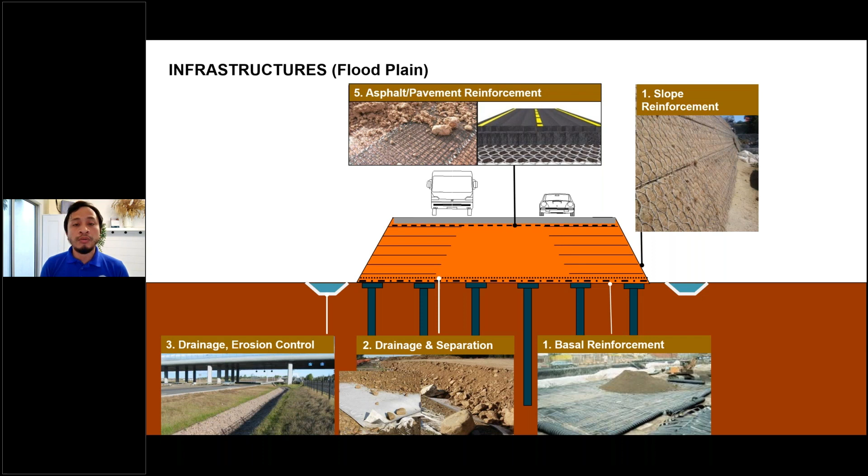That's one. And then also talking about space restriction nowadays - base side is almost gone, you will live with a very narrow ROW, so you have to build a steeper embankment. So what you can actually do here is introduce the reinforcement element into the fill so that you are able to build a steeper embankment, talking about 60 to 70 degree slope angle. And pavement - yeah, this is also something new - you can actually improve the design life of the pavements. Later we'll talk about this also.

And another scenario - infrastructure projects, road works - you will have to cut through the hillside, so talking about the balance of cut and fill.

On the left, you have to consider the hydraulic works and channel bank improvements. Maybe you have a river crossing, looking at the box culvert. What are the anti-scouring measures that you want to look at?

You'll also have rock slopes on the cut sections, and what are the things you can do instead of strengthening the slope. Maybe because of limited budget, you can install rockfall protection, which is more cost effective than strengthening the whole slope.

Similar to hydraulics and rockfall protections, an element of risk management is involved. You start looking at what are the risks to the public, whether low risk or high risk. These are the considerations for selecting the sustainable solution.

Lastly, this one you can see here is basically cutting through mountains, and this is another transportation project, railway. So what can you actually do to minimize the risk of rock falling and affecting the asset you want to protect here?

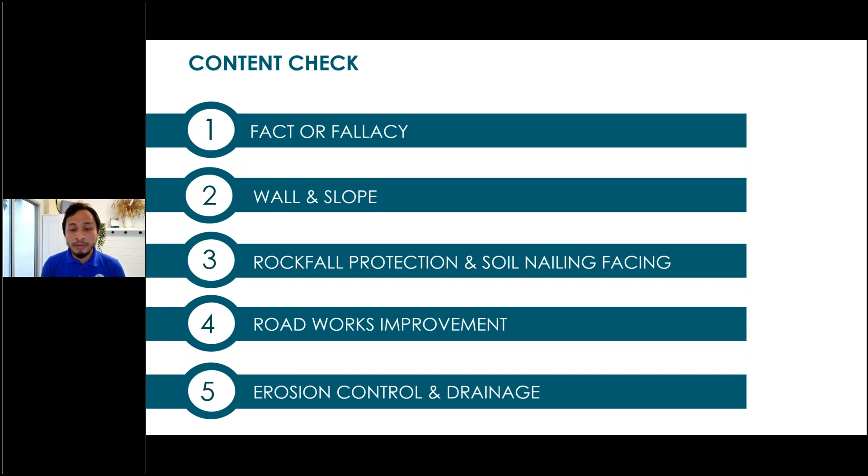Then we'll cover in detail walls and slopes, rockfall protections, and I'll give you an introduction to roadwork improvements, like basal reinforcements and pavement reinforcement, and lastly erosion control and drainage which is more related to hydraulic works. We'll go on to the concepts and engineering principles, and look at some mitigation measures you can implement for sustainable solutions.

Now this is our first misconception. Point number one is that sustainable solution is about green, low carbon emission only. This fact is not quite right. What does this mean? It's not just about lowering carbon emission.

We also want to recover back the carbon that has been released. So the sustainable solution allows for environmental integration. You can see here this is actually a reinforced soil slope using double twisted mesh facing, and you can't even see the steel mesh anymore after a few years. In fact, in Malaysia you start to see this even after several months, because we are a tropical country and grass can grow faster.

The whole idea is once this vegetation has been established, you recover back the carbon. So you're talking about carbon sequestration.

This is one of the projects in Italy, actually in River Reno. You can see here the gabion installed in 1894, and it's still there today. You can see that the structure is still standing - it's durable enough to meet the design life, and more than the design life that was designed for 100 years.

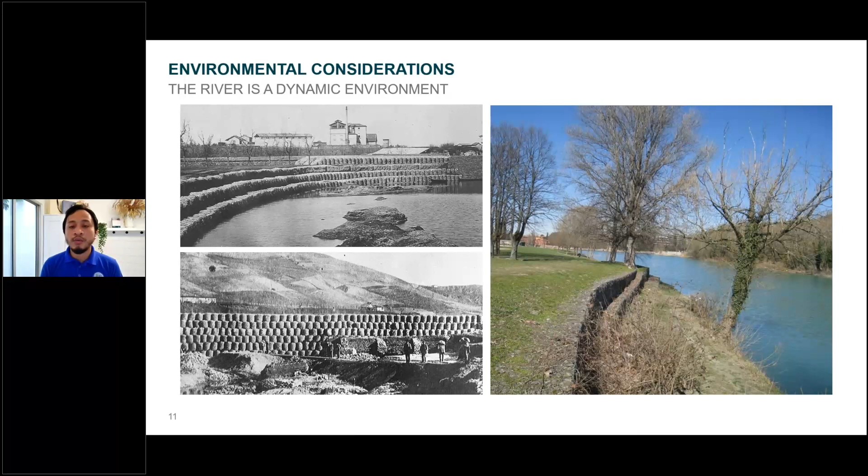When we talk about sustainable solution, it's not just about environmental friendliness. If you design this correctly, you can use this solution for many types of situations - building a fill over weaker ground, or utilizing excess cut material from a cutting section. Rather than using granular backfill, you can use this material with low hauling distance, meaning low carbon emissions, and introduce reinforcement elements into the materials, allowing you to build a steeper slope.

Going back to the earlier point on scarcity of materials - on one highway project we're working on, still ongoing, they have about 3 million excess cut, and what they do is utilize at least 60% of the cut as fill material for the fill section construction.

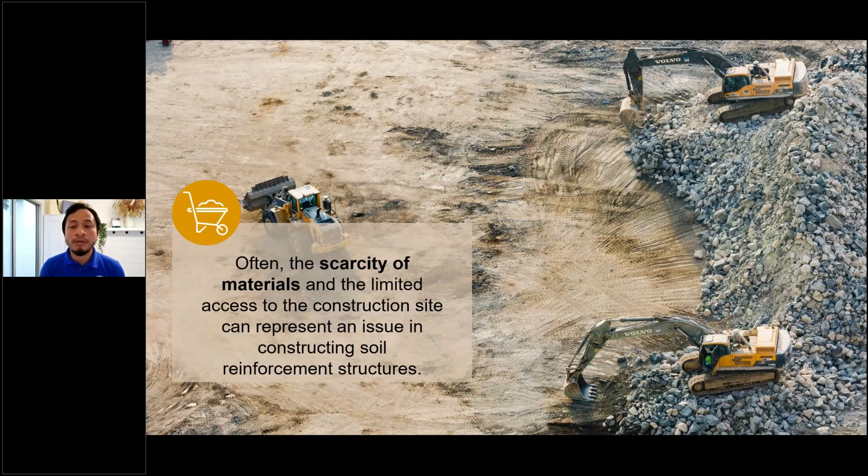So this is about the introduction of high strength reinforcements, and introducing vegetated facing on the front face of the reinforced soil.

Now, a sustainable solution, because this is also an engineered product, it's all been assembled in the factory. Talking about productivity, one advantage is that some products are modular, meaning everything is assembled at the factory. You just proceed with field placement, for instance for reinforced soil construction, as you can see in this picture. All the material is assembled at the factory, so it's quick to install and doesn't require skilled workers.

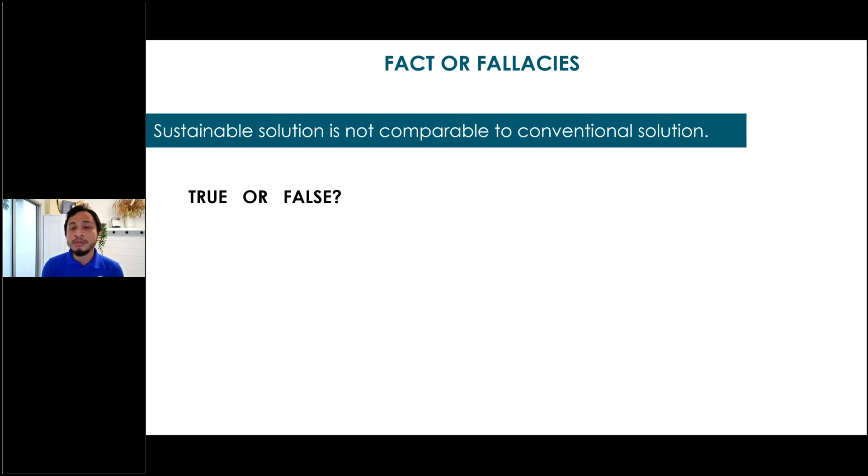Fact number 2 we want to cover today is that sustainable solutions are not comparable to conventional solutions. This is pretty subjective, I think, because as engineers we always rely on precedence. We want to design with materials we're comfortable with based on past experience. That's why this talk is a good opportunity to introduce a new solution. At the same time, this is not a magical product. It doesn't work wonders if you don't obey the engineering principles behind it.

And this one is an 80-meter high rock facing wall.

This one, let's just talk about durability. If you look at this gabion, some argue in Malaysia that gabion is meant for temporary works. Later I'll show you that if you design the right coating, a gabion can be designed for up to a 120-year design life. This is all covered in British Standard EN 10223 together with ASTM A975.

Now, when talking about durability of sustainable solution gabions, one issue you normally encounter is corrosion on the gabion. This happens because the coating is actually the line of defense for the gabions. Once the coating is exposed, the base metal is exposed to atmospheric conditions and corrosion starts. When you have corrosion, you get tearing of the gabions, and eventually the rock fill in the cage washes out into the river.

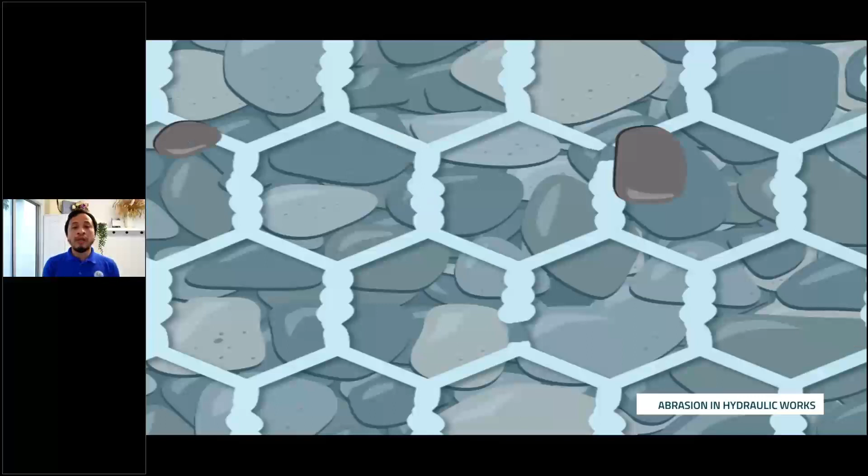Now, abrasion means, as you can see from the video, in our rivers you normally have high suspended sediments, and these suspended sediments apply abrasion forces to the coatings. Over time, throughout the exposure during the service life, you start to get a reduction of the coating layer.

So one of the advancements over the years is what we call advanced coating, which has higher abrasion resistance. Later I'll show you how you can verify this abrasion performance through laboratory testing.

This is a new clause that has been added in ASTM A975 2021, and you can see from this clause that abrasion resistance testing has been added to the test index. This abrasion test compares the performance of advanced polymer coating as opposed to the typical polymer coating normally used in Malaysia, which is PVC. You can see here this coating will have better resistance to abrasion.

What the test does is try to scratch the coating and measure how many cycles it takes before the base layer of the base wire starts to be exposed. For comparison's sake, advanced coating gets about 450 cycles, as opposed to PVC which is only about 50 cycles.

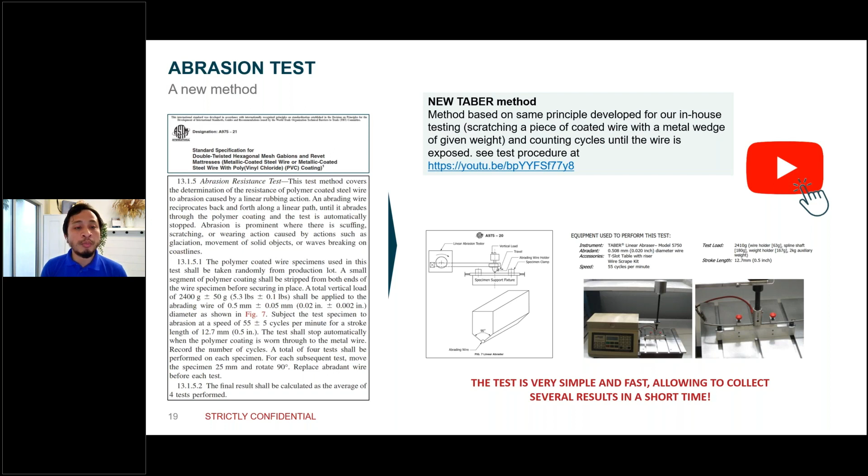So these are some of the additional product innovations that have been introduced in the market. If you think it's suitable for a project, especially on river works, you can explore it as a solution.

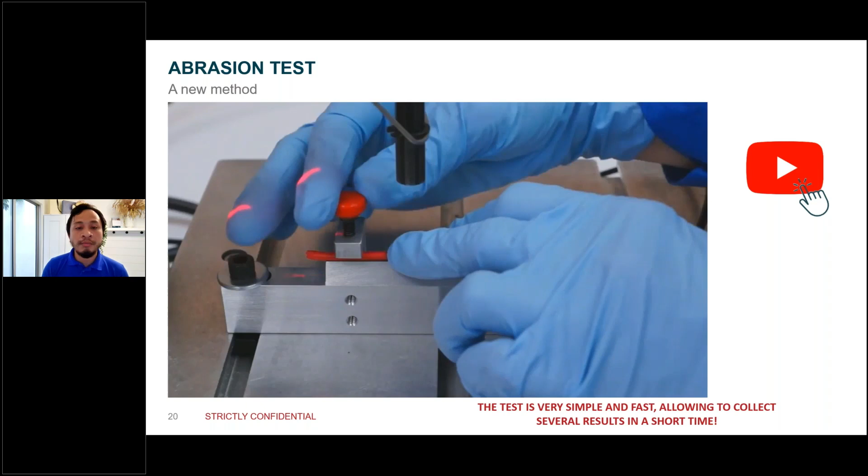Now, this is just to show how the test is carried out, and you can see here the machine and equipment. What this does is try to scratch the coating layer that protects the base wire. You can see here the lab technician trying to assemble it. It's a very simple and fast test, and you can do it in less than 10 minutes.

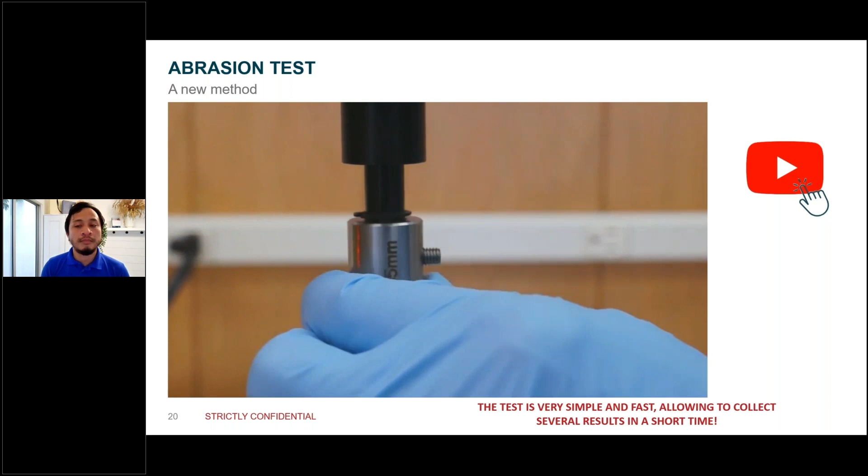So I'll maybe bring it forward. I just want to show you how they actually measure the cycles.

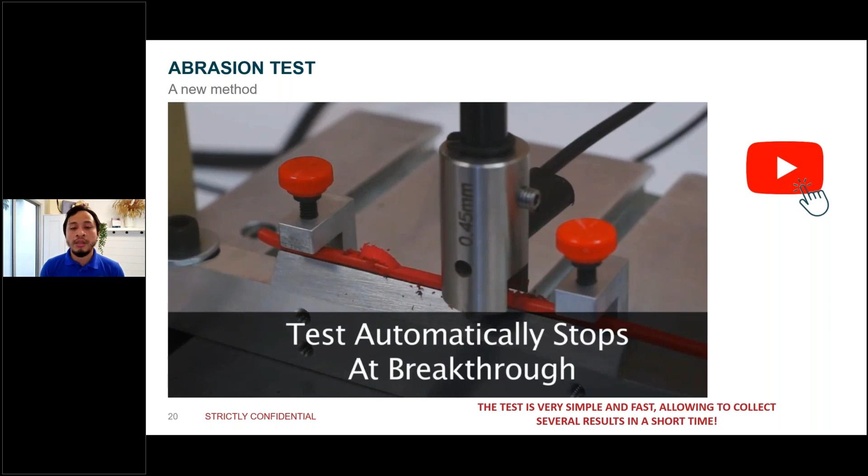So this is when the test started, right after the assembly. You can actually see we try to measure the amount of cycles for the coating to start to expose. After a few minutes, you can start to see the breakthrough and the base wire is being exposed, and you record down how many cycles it takes.

Now in terms of durability, gabions is not a simple structure. Actually, there's many engineering principles behind it. One of the engineering properties you need to understand is really the coating. You can see here, in Malaysia we're normally looking at C3 environments. For gabions in subtropical or tropical zones, it falls under C3, and with zinc coating, you can have about a 10-year design life.

Point number two is, as you can see here, some specifications require zinc coating plus PVC. Even if you do that, you can't achieve a 120-year design life, because the codes say that if you want a 120-year design life, you need to specify Galfan coating plus polymer coating. So this is just to give you a brief introduction about the coating requirements, hence the durability aspect of the sustainable solution.

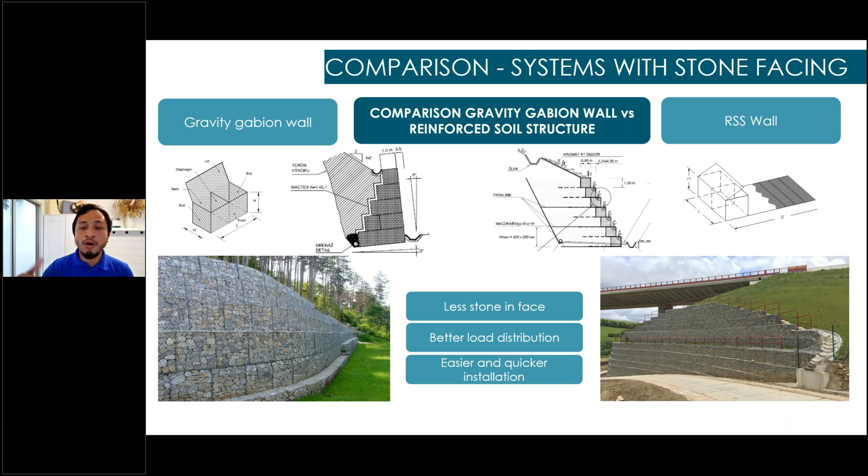Now, when we talk about slopes and walls for sustainable solutions, there are two examples here. One is if you use gabion—gabion is actually a mass gravity structure. The one on the right is what we call reinforced soil structures. Here, gabion is still used at the facing, but the difference is the gabion acts only as a facing, there for erosion protection purpose. The stability of the slope is actually controlled by the element of horizontal reinforcement placed at certain vertical spacing over the height of the slope or wall.

Now, the basic concept of reinforced soil structures: as you want to build a steeper slope without reinforced soil structures, you will have a tendency for the slope to fail at a certain angle. We're talking normally about 1 to 2 for a filled slope, and maybe a cut slope is about 1 vertical to 1 horizontal. This is what happens when you try to build a slope of more than maybe 45 degrees fill.

Now, what we can actually do here is introduce the element of reinforcement. It can be in the form of geosynthetic or metallic meshes. It doesn't matter what type of material you use, but the whole idea is to increase the tensile resistance of the fill, and eventually increase the apparent shear strength of the whole fill materials.

Looking at the right, the reinforcement needs to be long enough to be embedded into the passive zone, which is the stable zone. The active zone is actually the critical failure plane that you already identify when you do the stability analysis. The length of reinforcement needs to have sufficient bond length to prevent pull-out failure modes, whereas the strength of the reinforcement needs to be sized correctly to prevent rupture failure mode.

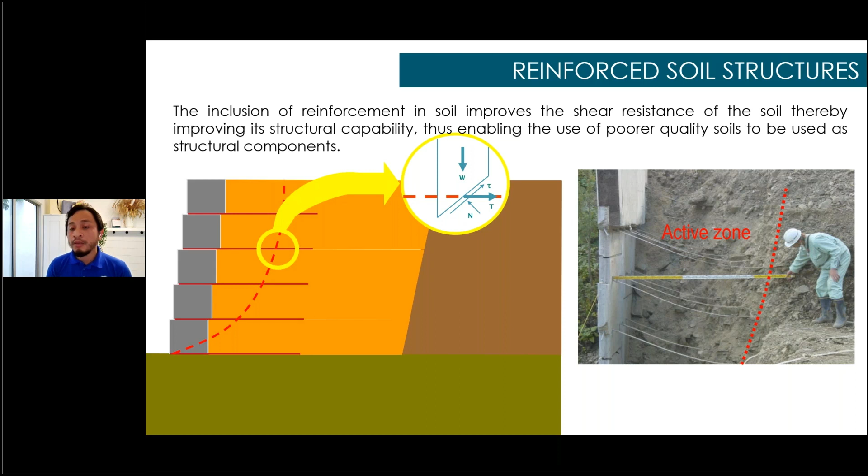Now, similar concept for any shear strength concept—shear strength is actually a function of effective stress.

So the higher the effective stress, the higher the shear strength. Now, when you introduce reinforcement, it basically adds additional force resistance in terms of tensile strength, eventually increasing the overall safety and stability of slopes and walls.

This next illustrates another concept contributed by geosynthetic reinforcement, in this case the geogrid. By having this geogrid, you can achieve a confinement effect, which increases the confinement, sigma 3, the lateral resistance of the fill materials. You can see here the one on the left is unreinforced, and the one on the right has a series of geogrid introduced into the fill.

The fill can actually take a load of about 15 kPa. The weight of this guy is about 75 kilos. This is just a simple example experiment that you can actually carry out at home.

Now, when we talk about reinforced soil structures for slopes and walls, the difference is the cutoff at 70 degrees. This is taken from BS 8006. The one on the left is what we call reinforced soil slopes, gentler than 70 degrees, whereas the one on the right is reinforced walls.

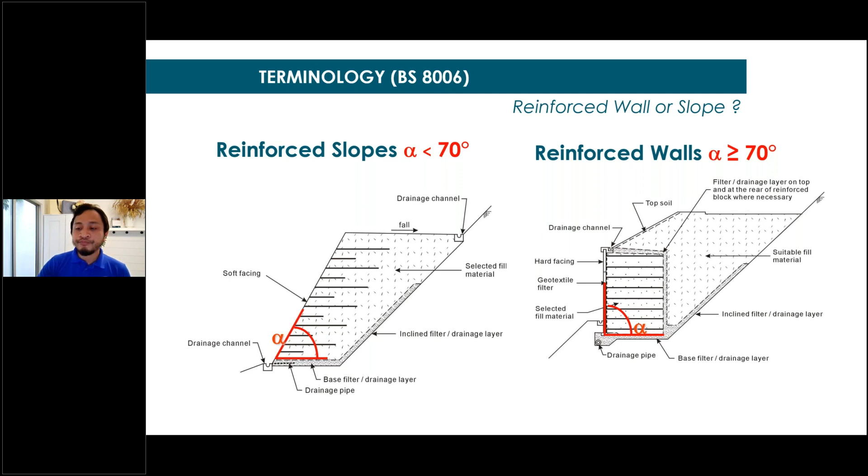For reinforced soil structures, there are two components you have to design for. One is the tensile strength. When you talk about tensile strength, you have short-term tensile strength and long-term tensile strength. The short-term one is not what you use for the analysis; you should be using what we call the long-term design strength.

This long-term design strength is derived by introducing reduction factors into the ultimate strength. So if you specify a geogrid with an ultimate strength of 200 kilonewtons per meter, you can't use that 200 kilonewton value directly in your analysis. You need to check with the manufacturer what reduction factors should be applied.

There are several categories. One is the creep effect, and normally this has the highest reduction factor. You also have installation damage, which is a function of the type of fill material used for the backfill. For example, gravel fill will cause higher installation damage compared to sandy or silty particles.

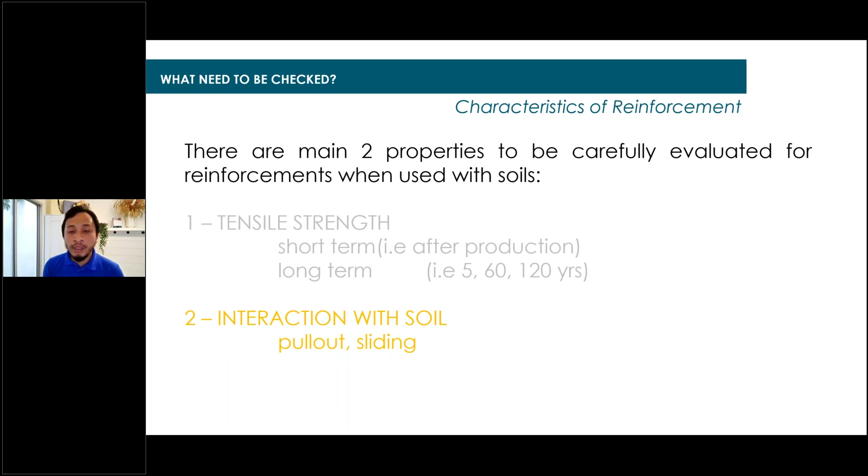The second failure mode is about the interaction with soils, pull-out and sliding. I've just shown you the active and passive zone - this is where it came in. So you need to be sure you have the right amount of anchorage length within the passive zone to prevent the reinforcement being pulled out away from the fill. It's all about the soil-reinforcement interaction.

I mentioned earlier in my presentation, this is all engineered product, so you still need to compact the fill - 95% MDD, 98%, or 90%, depending on the project requirements. By having this compaction, you get a closer bond, intimate contact between the soil and reinforcement. Reinforcement won't work without contact with the soil - it relies on that contact to provide tensile strength to the fill.

This illustrates the two common failure modes for this interaction. One is bond or pull-out failure, where if you don't embed it long enough in the passive zone, you get pull-out failure. The second is sliding, checked based on typical values of pull-out coefficient and direct sliding coefficient. It varies by material type - gravel offers a higher pull-out coefficient compared to sand or finer material like clay and silt.

In Malaysia, for reinforced soil structure design, you can use two methods. One is allowable stress design, where you don't introduce reduction factors for materials, uncertainties, or subsoil conditions - you're looking at a safety factor of maybe 1.3 or 1.5.

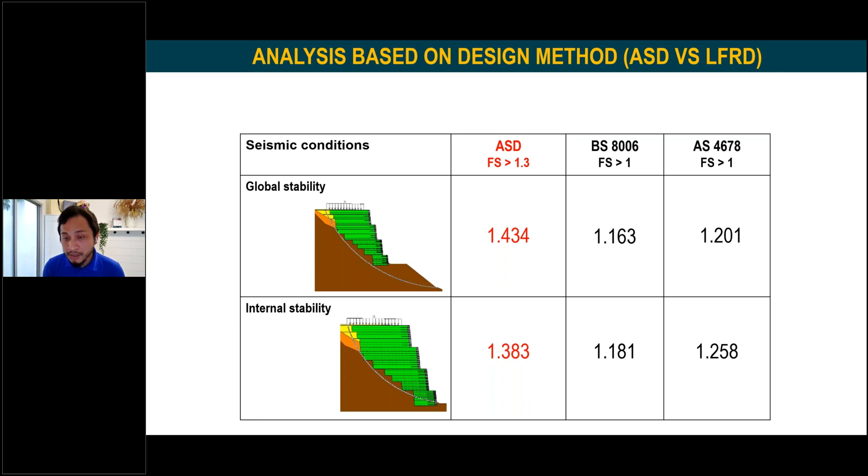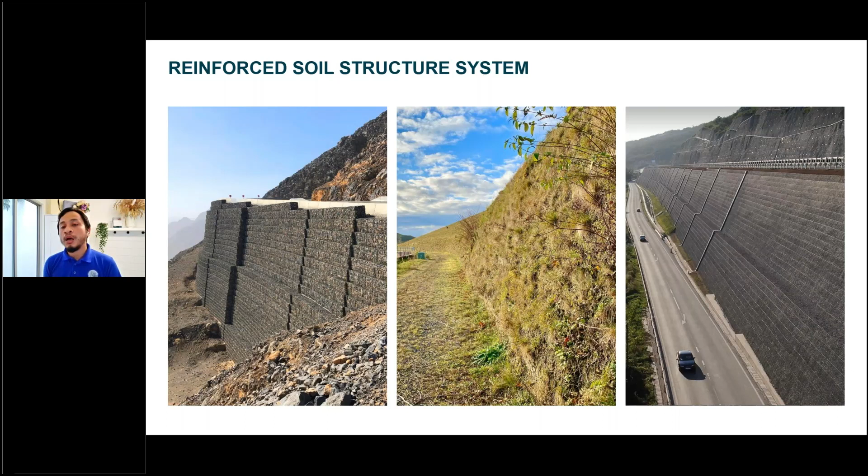In terms of reinforced soil structures, as I mentioned, facing options - I'll focus on three. One is gabion facing, the second is vegetated facing, and the one on the right is an upgraded version of gabion facing where we introduce a smaller welded panel, allowing smaller rock fragments to be installed.

This is how the stone facing option looks - you have the gabion facing, and the mesh reinforcement's extended tail can also act as reinforcement. For this type of application, for around 6 meter high walls, you may not need geosynthetic reinforcement - you can rely on this metallic mesh reinforcement for the design.

You still need, as you see here, rock facing and fill material - but these two materials are not compatible, so you need a separator. For this case we use non-woven geotextile, which helps separate the two incompatible materials, in this case rock and a finer fraction of fill.

This is one project, the East Klang Valley Expressway, an ongoing project that uses this reinforced soil structure system. They use it because they have excess cut material, about 3 million cubic meters, and utilizing this excess cut as fill material saves a lot on overall project cost, especially the hauling distance needed to import granular backfill into the fill section. This is another view of that project, about 35 to 40 meters high at maximum wall height.

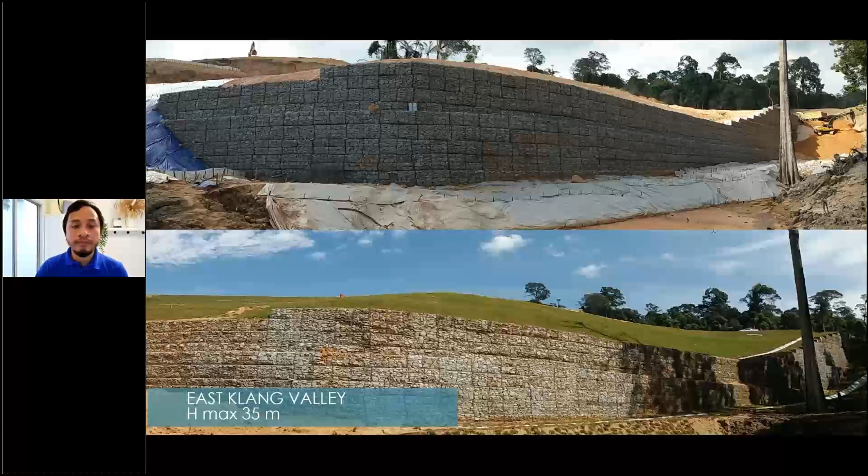This one was recently completed at KL-Karak Highway, kilometer 66. This highlights that a sustainable solution doesn't compromise durability requirements - if designed correctly with the right coating, it can achieve a design life of up to 120 years without any problem.

This one is at Istana Sharqiyah - they use this system for the access road to the palace on top. You can see here the environmental integration, trying to recover some of the carbon released, which is why vegetation is allowed to grow on the face of the gabions.

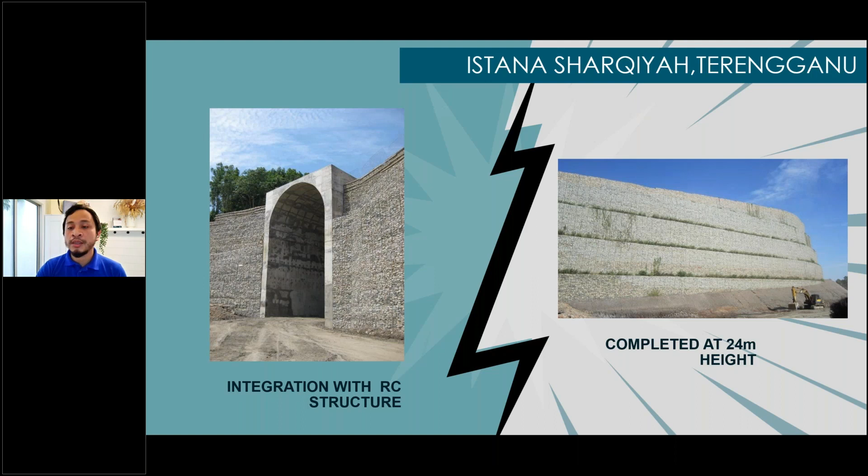This option can integrate well with any reinforced concrete structures. Now, this one is at the river banks. This rock fill facing option can also prove to be a viable solution. We'll cover this more later, but basically, by having a rock facing, it has higher roughness. When you have higher roughness, the velocity along the river starts to slow down at the contact between the gabion and the fluid.

You can see here, this structure is actually being used in frequent dynamic loading conditions where it has frequent vibrations being transferred over to the walls or reinforced soil structures. And this one again, for TNB projects, it is a suitable option not just for new projects but rehabilitation works, especially talking about riverbank improvement works.

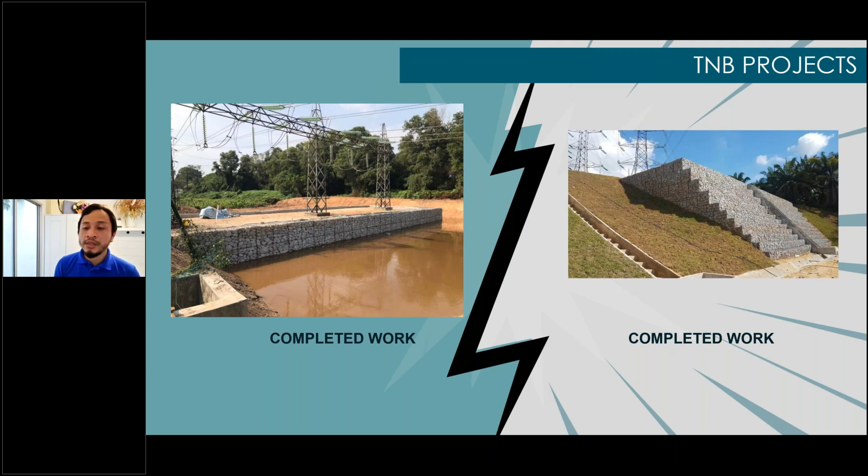Now, this one I just want to talk about the stone facing option number 2. These are the welded panels that we introduced at the front facing, and by having these, you will have a cleaner look in terms of the aesthetic appearance of the overall facing of the reinforced soil structures. And this is how it looks like in Romania - a 22-meter high motorway using this reinforced soil wall solution.

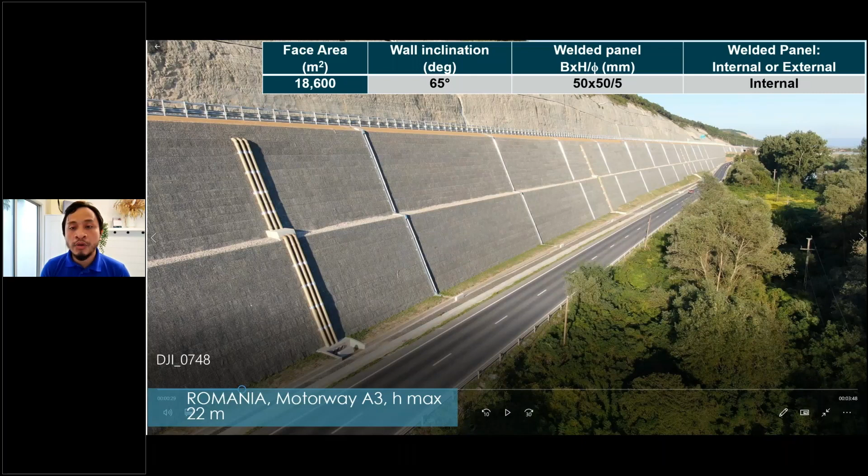Now, another concept, another design of this reinforced soil structure - normally reinforced soil structures require the length to be about 70 to 90% of the slope height. With this shoring MSE wall option, you will be able to reduce the length requirement to 30% of height, or minimum 3 meters. So what does this do?

It transfers the reinforcement loads to the soil nails or the anchor of the cut slope behind this fill. This is applicable for maybe a road widening project where you're talking about extending a few lanes within your ROW, and you don't really have space. If you want to build maybe an additional 10-meter high fill, you may need 7-meter space, but by having this, you only need about 3-meter length of space to achieve a similar performance structure as typical reinforced soil structures. This is one of the recently completed projects that we have in Taman Sri Rusa, Port Dickson.

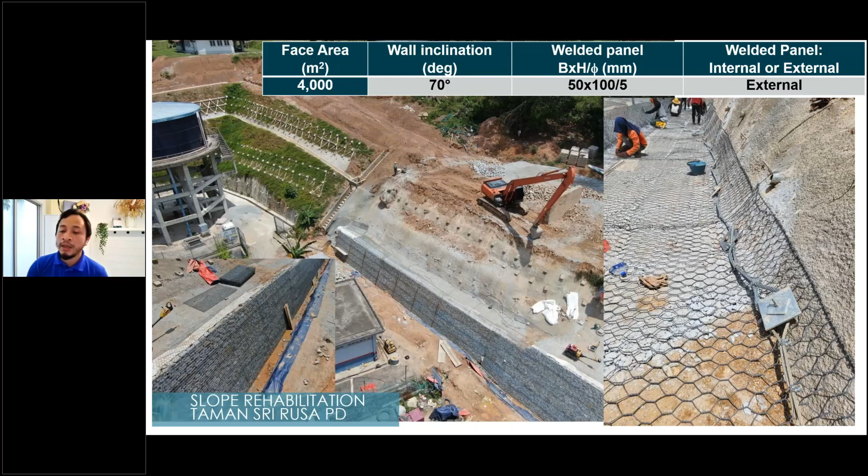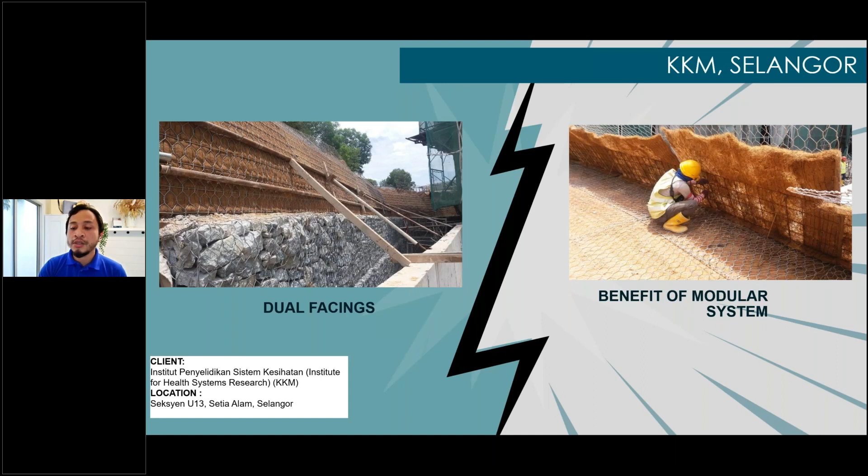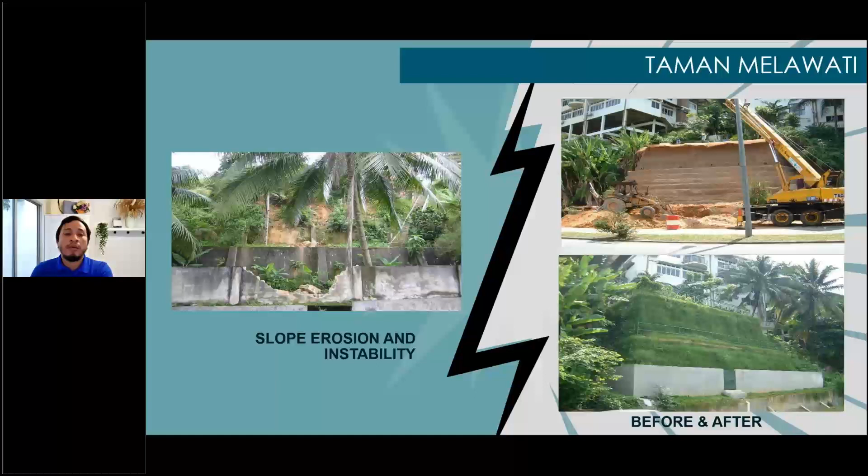Now I want to introduce another element of infrastructure structures. Just now we covered the MSE wall system. This is a hybrid structure system that introduces the concept of primary and secondary reinforcements. With this reinforcement, you can increase the vertical spacing - in this case, geogrid reinforcement may be more than a meter, even 2 or 3 meters. The secondary reinforcement controls shallow failure modes within 3 to 6 meters from the edge of the facing, whereas the primary strength is provided by high strength geogrid installed at maybe 2 meter vertical spacing over the slope height.

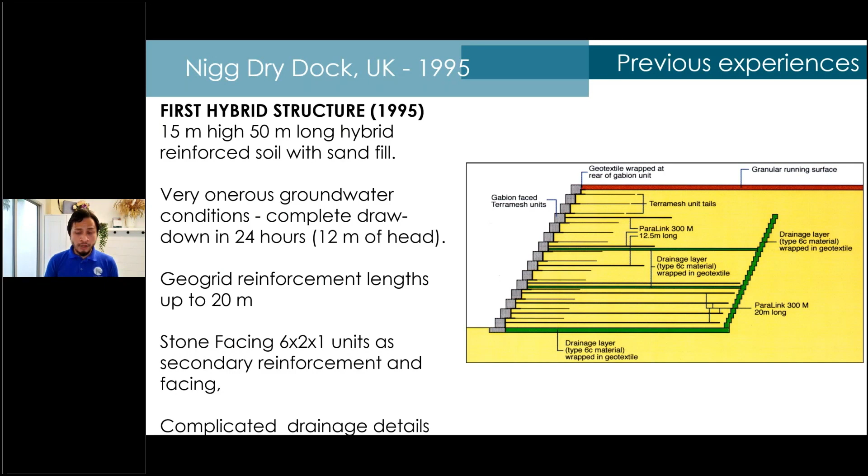This is one of the projects that used this system - a dry dock project involving frequent rapid drawdowns. This is a place where they used to repair ships, and the water is drawn down frequently and increased frequently. The reinforced soil structures served their purpose very well, even under this condition.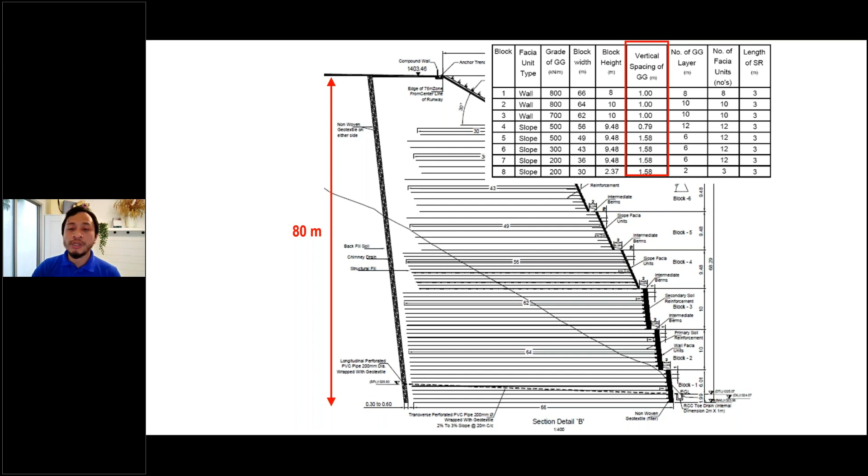Now this is another new element, we call it the mono anchor system, in terms of productivity for rapid intervention. This is quite common in Malaysia, where you have landslides at the toe and difficulty accessing it. You can use this type of system because it's productive enough due to the larger area facing - about 10 square meters, so you can assemble it within an hour.

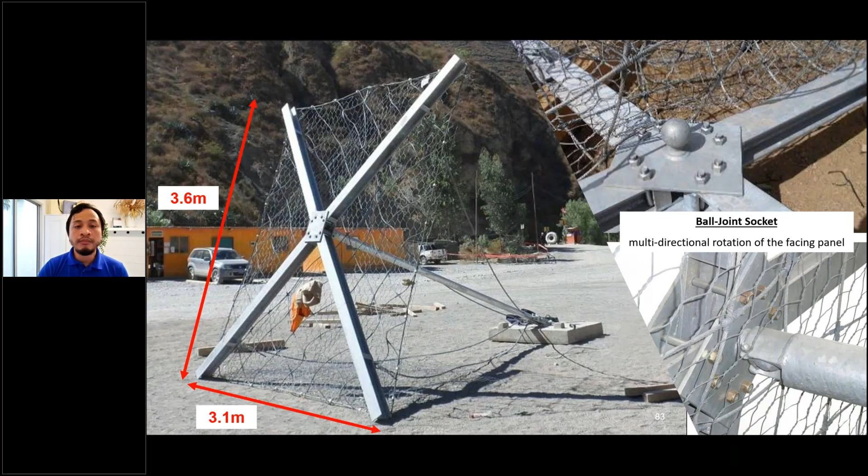Just to illustrate one completed project here, they tried to have access from one side to another. The beauty of this system is you can combine it with anchor reinforcement and install the mono anchor structures, placing the fill, and boom - you can have access from one side to another in just a few days or few weeks, depending on the length of the works.

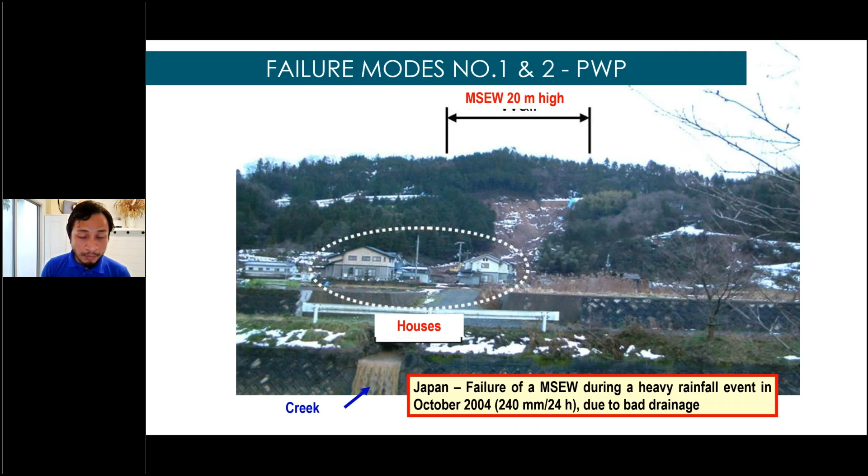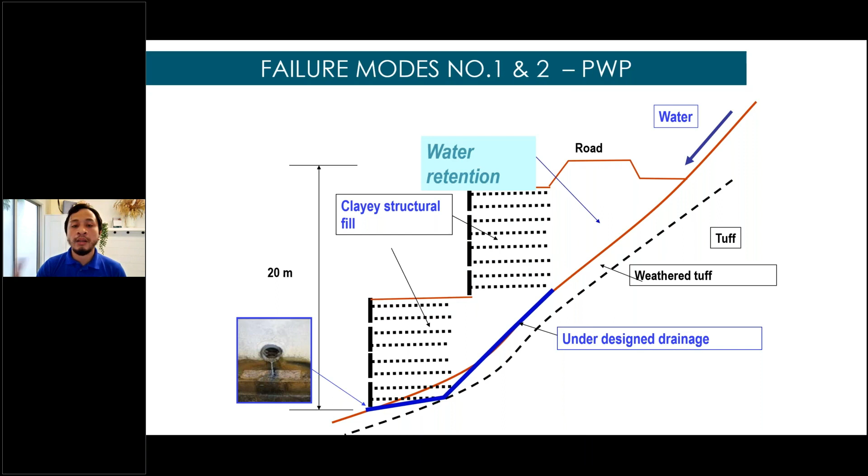Now, reinforced soil structures are all subject to failure. This is why I keep mentioning the drainage blanket - water is the main culprit here. You can see this project shows infiltration of water into the fill. They used a clayey structural fill and had some pore pressure issues, not just due to infiltration but also external groundwater influence. Even though they put in a drainage blanket, it may not be high enough to intercept all the groundwater, and some groundwater passes through and builds up pore pressure within the upper part of the structural fill. This is what remains - you can't even see the structures anymore. So it's always important to handle or cater for the water.

And this is another sustainable solution you can use - we call this a drainage blanket solution, a geocomposite drainage. So instead of placing a sand drainage or gravel blanket at the back of the slope, you can use this one. It's made of polypropylene, and you can see the wave profile is actually to provide some sort of stiffness to the cores.

This one, for any drainage blanket, is all about the filter design concept. Two things that you need to check are the piping and permeability criteria. You want the pore between the particles to be small enough to prevent any piping failure modes, and also large enough for water to pass through it. So it serves a dual function, separation and drainage, hence the term filters.

There's also an argument that if you use non-woven geotextile, there will be a sludge build-up, and then this drainage may get clogged. But in actual case, this sludge build-up is of low saturated density, and in any filter design, you just need the permeability of this sludge to be large enough as compared to the natural material around it.

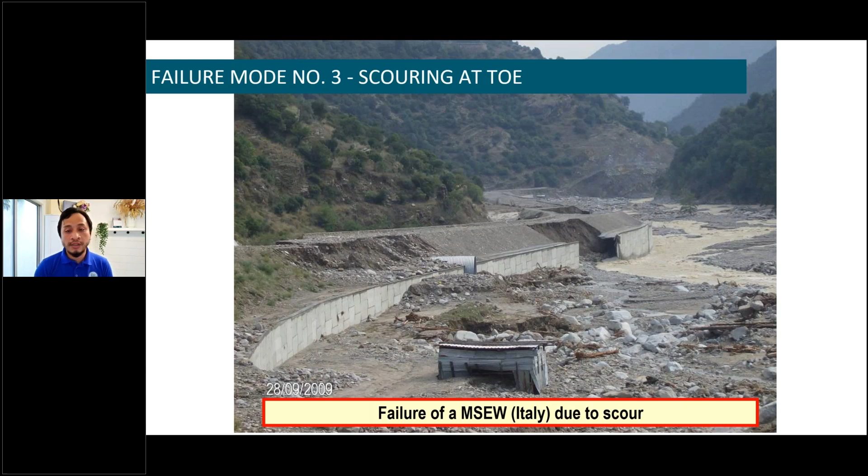Now, this is another problem when you talk about reinforced soil structures built along river banks - you will start to have scouring. How can you prevent this? One option is you embed the gabion maybe 1 or 2 meters below the riverbed. By having this, it will protect the toe, so in case you have loss of fines at the front, they will still hold the structure.

Alternatively, if you want to explore another option, you can lay this mattress, and the length needs to be long enough, at least twice the depth of scouring expected throughout the design life. So by having this - more often than not, the most common problem along the riverbank, especially for walls and slopes, is just about scouring at the toe, not really slope instability or wall instability itself.

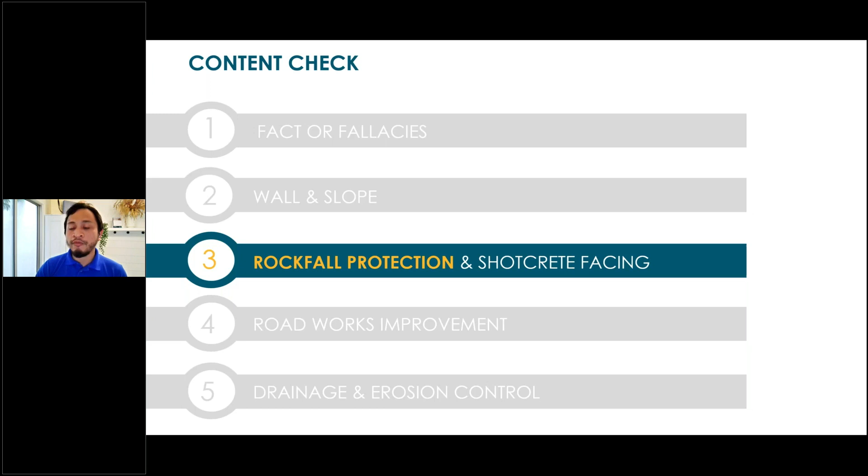Okay, that covers walls and slopes. Now we'll run through rockfall protection and shotcrete facing. Rockfall protection is often confused with reinforcement options. What is the difference between protection and reinforcement? Protection, in the case of rockfall, does not stop the rock from falling, but it controls the trajectory of the rockfall.

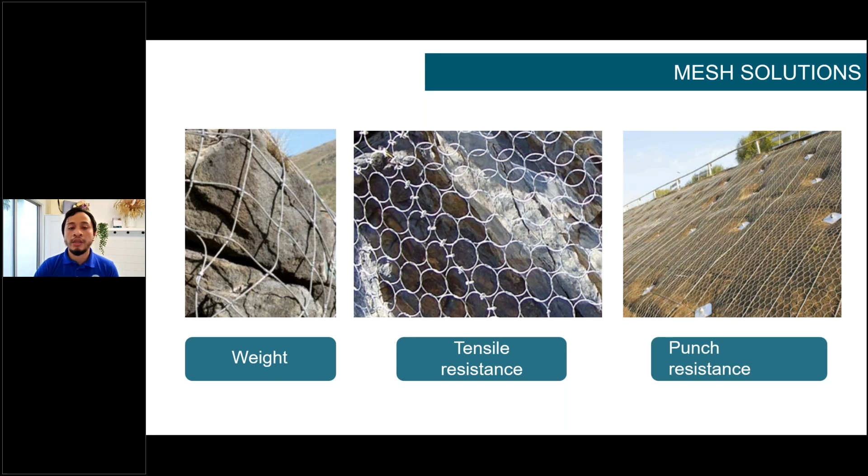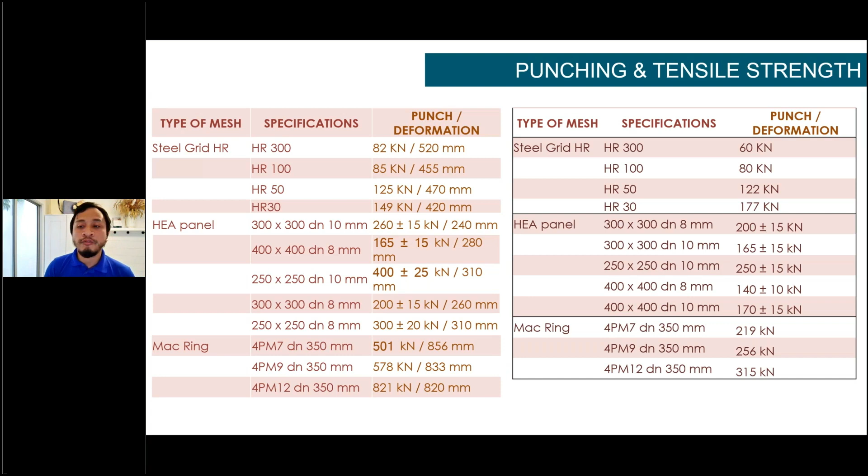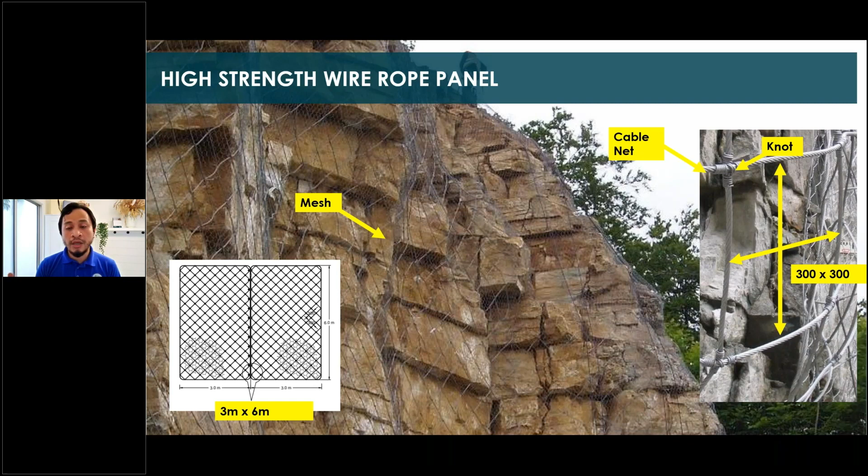Several types of products or solutions for rockfall protection netting. This one is a high strength wire rope panel, which has a way higher punching resistance. High strength steel mesh is only about 150 kilonewton, while this one can provide up to 400 kilonewton. The setback is this only comes in 3 by 6 meter length rolls, so it's relatively more time consuming to install, as opposed to high strength steel meshes which come in rolls of about 3 by 25 meters, so you just have to drag the slope and do it fairly quickly.

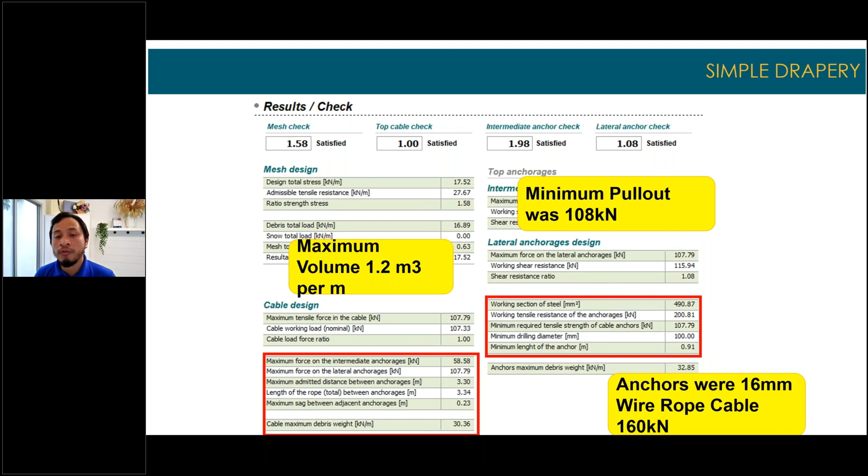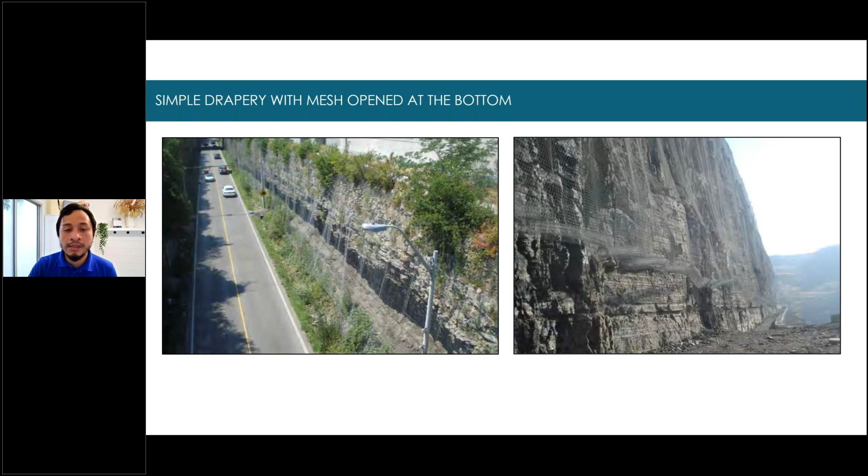This is how it looks in real life, at Bukit Cheras. You can see simple drapery system with high strength steel meshes, and some spots of bolting here and there. That's more about localized stabilization of the slope, it doesn't really fall under the pin drapery category.

This is how it looks at Jalan Duta, at the top of the slope. You need to anchor it on top, size the anchorage length of the anchor correctly, and pick the right diameter of the anchor rope, which helps distribute the load to the anchor.

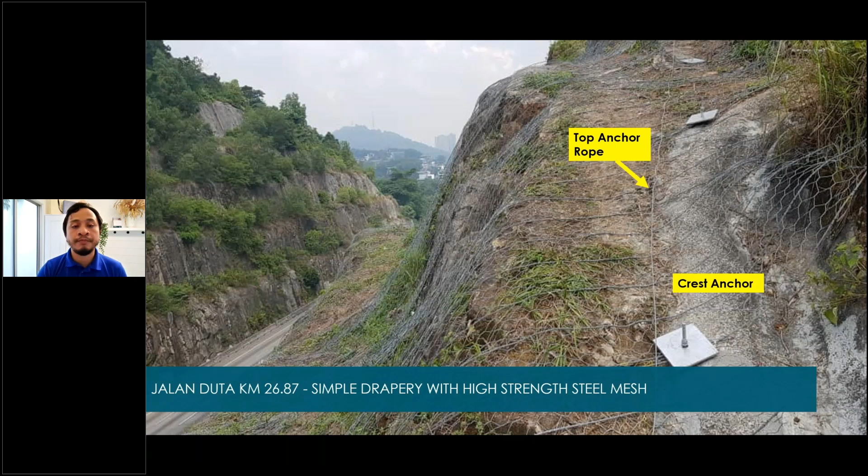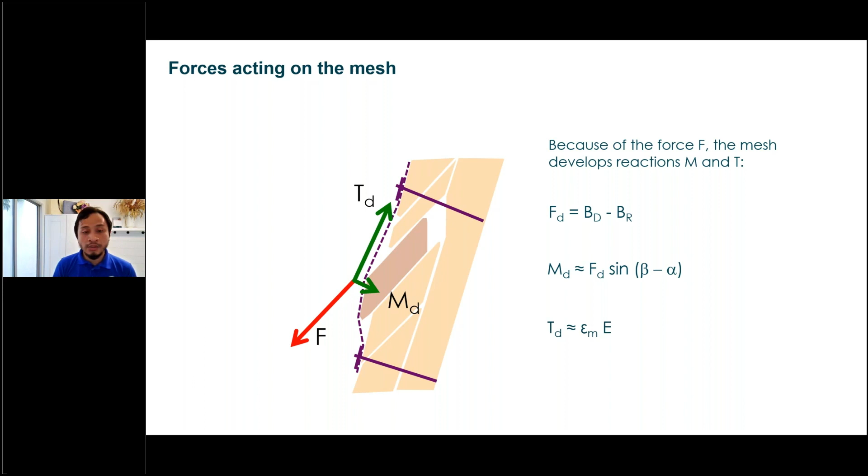This is a pin drapery system. I keep mentioning that for pin drapery, it's all about the punching capacity. This is the free body diagram - you can see there will be a tendency for the unstable block to punch through the netting between the anchors. So you need to provide the right punching resistance on the netting so it will not be punched through by the detached block.

Similarly, how you determine how big the detached block will be is a function of the dip and strike of the rock slope. You need to do a proper rock slope mapping and identify the critical joints before checking the required punching resistance for the pin drapery system.

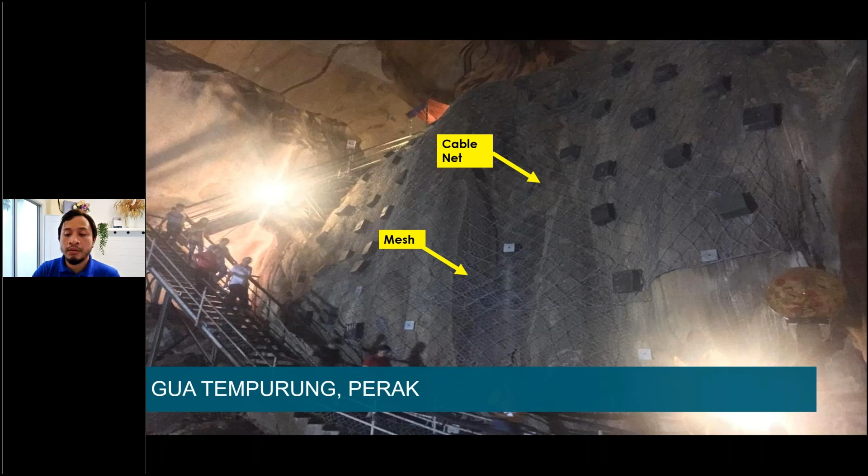Now, flexible rockfall barrier solution. When we use the term flexible, this solution is different from rigid, where you have to design the structure strong enough to take the kinetic energy it's been designed for. This flexible barrier you want to design flexible enough because the dissipation of energy is through the deformation of the various components - the netting, the brakes, the post. So all of these will deform to dissipate the energy.

Now, in the rockfall protection system, for the rockfall barrier what you normally have to do is the rockfall trajectory analysis. From this analysis, you get the design velocity. This design velocity you have to multiply by the boulder mass that you identify, be it 1 ton or 2 ton, as a function of the unstable blocks identified during the rockfall mapping, and from there you get the energy level.

The second output from the rockfall trajectory analysis is the bouncing height. Bouncing height is important to determine the exact post height for the rockfall barrier system you want to pick. So two things to consider for rockfall barrier: one, bouncing height; second, the energy, which is a function of the boulder mass and velocity of the trajectory at the location where you want to place the barrier.

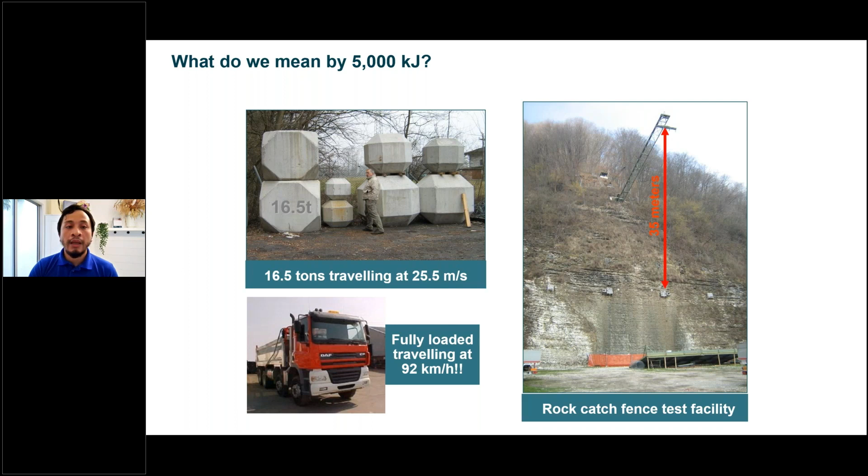This test is actually covered under European assessment documents. One thing that differentiates manufacturers is the testing verification for the rockfall barrier solution, so you may want to specify the certification requirements in your spec to protect yourself, because the elongation, for instance - you may have contacted several manufacturers and they've quoted certain amounts of elongation. This elongation is actually verified through this testing. If you don't put this certification in the spec, you may end up with a barrier that hasn't been tested under the European assessment document.

This just illustrates the range of energy it can be designed for. What's interesting on this slide is the upper part - you can see RB35 and RB75, that's less than 100 kilojoules. These rockfall barrier solutions are suitable for cases where you only have smaller rock fragments, but instead of draping the whole slope with netting, which would be costly, you want to explore using this low energy barrier for rockfall protection. It will save much money in terms of the project cost.

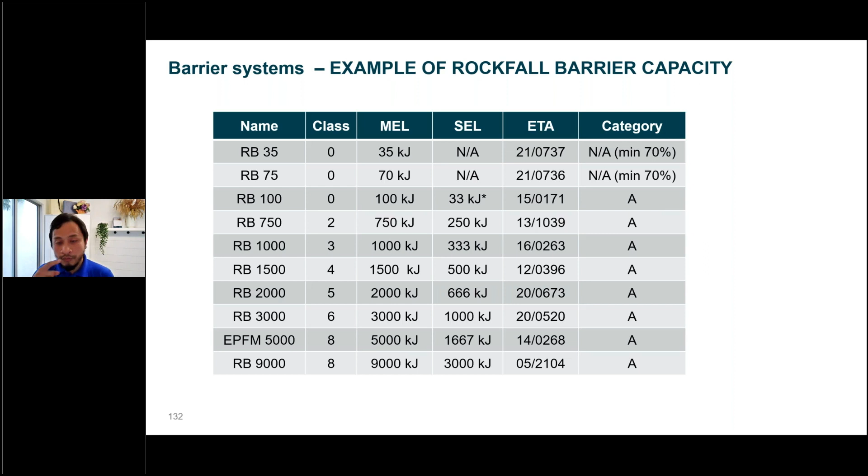Now, when you talk about rockfall barriers, the most common property that you specify in the spec is just kilojoules - like you need maybe 5,000 kilojoules - and maybe you put in some certification requirements like ETA.

Performance specifications go beyond that. For instance, elongation - different manufacturers will have different elongations, maybe 4-5 meter difference, sometimes even more. We'll see how it looks like later. Another aspect is the residual height, the lateral gaps, and lastly the measurement of forces.

Measurement of forces is more towards optimization of the rockfall barrier design, where by having lower forces, you require less anchor numbers for installation. Hence it will expedite the construction time.

This illustrates point number one, residual height. You can even get category C with EAD certification. The only difference is category A comes with 50% nominal height. Residual height means after the first impact, we measure how much loss of height there is on the netting, and this height cannot be recovered anymore throughout the service life. So if you specify category A, you'll have a higher buffer zone as opposed to category C, which is less than 30%.

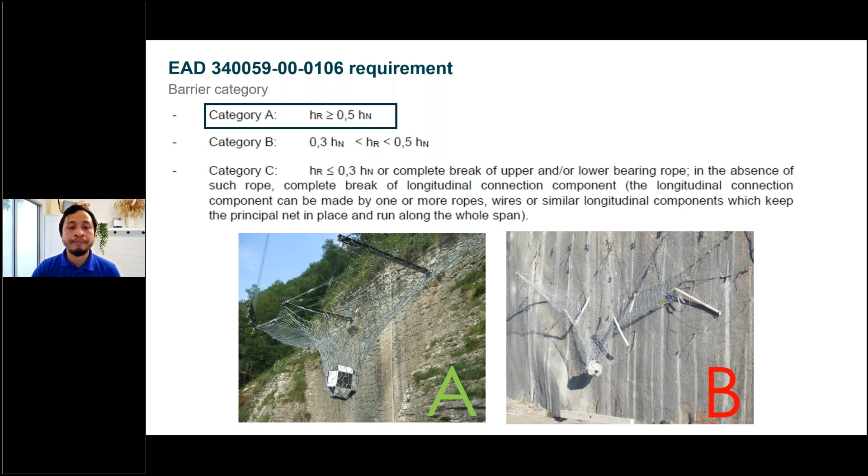Now the second point is the elongation. This barrier really elongates - the nettings can elongate maybe 8 meters, 5 meters, depending on the amount of energy it has been designed for. So if you check only with one manufacturer on elongation and don't specify these elongations in the performance specification, the contractor can actually supply any type of flexible barrier to meet only the energy requirements.

Imagine the boulder that may pass through the gaps in the middle. So instead of not specifying lateral gap, you should really be looking into it.

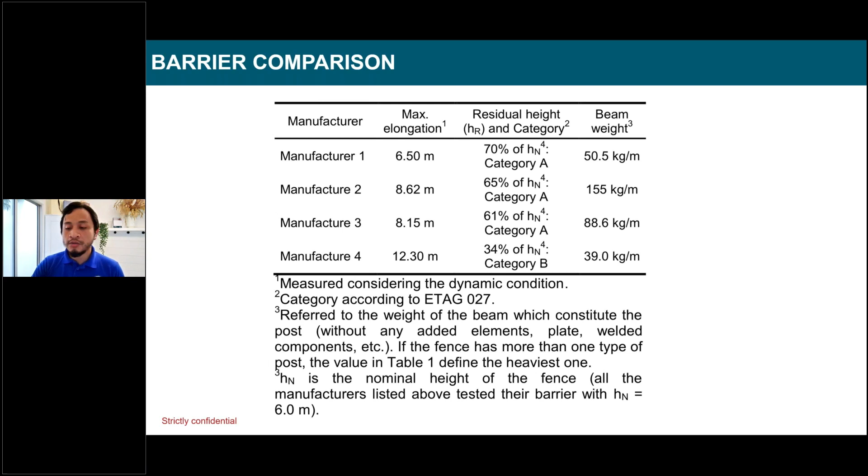And early warning system—this is also some other innovation from various manufacturers. You can actually install this early warning system onto the rockfall protection, be it barrier or netting, and then we send a signal that the structure has been impacted by the rock.

It doesn't really measure any strain or any quantitative assessment of the slope. It's more of a warning system where it alerts the people, especially your maintenance team. If you have very limited resources, instead of inspecting the slope every month or every two weeks, you can install this and zoom into only the slope with the problem.

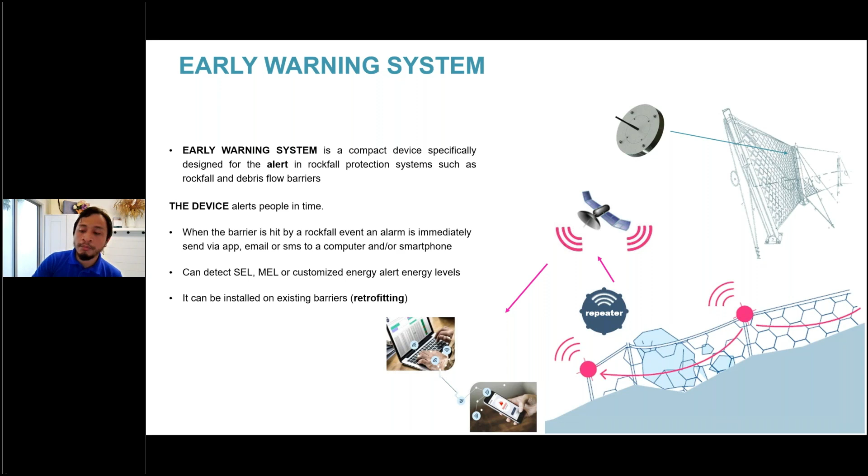Now we have covered the rockfall protection. Now I just want to give you an introduction about the soil nail facing.

So what this means is all the manufacturers use a similar netting for the rockfall protection, but they add in this geomat for vegetation growth. So basically you install this and start to spray the hydroseeds, and you end up with a vegetated soil facing, instead of shotcrete facing, which falls under the hard facing category.

This is just a comparison between the types of facings. You can see the soft facing is really meant for a very gentle slope with soil nail, maybe one vertical to 1.5 horizontal.

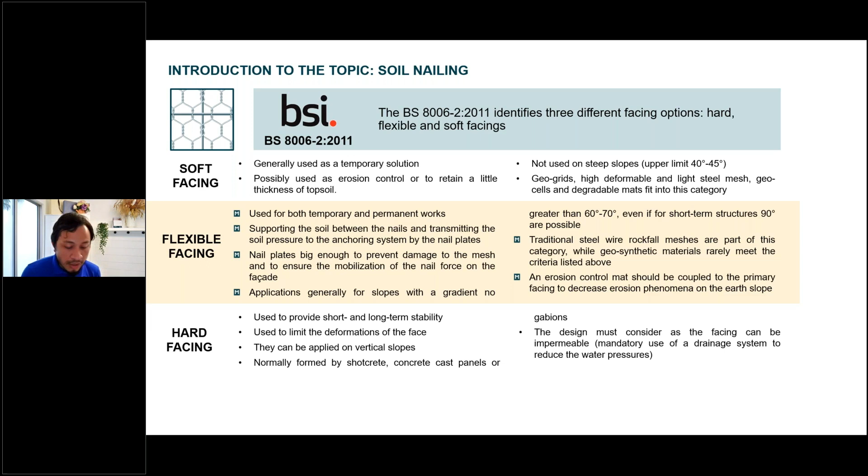If you're talking about 70 degrees, 60 degrees slope angle, flexible facing or hard facing may prove to be more viable in terms of the technical requirements.

And how you can actually size this is what we call a hybrid method, similar to the concept of pin drapery, but instead of checking the strike and dips, you verify the performance through this sliding mass and base wedge concept.

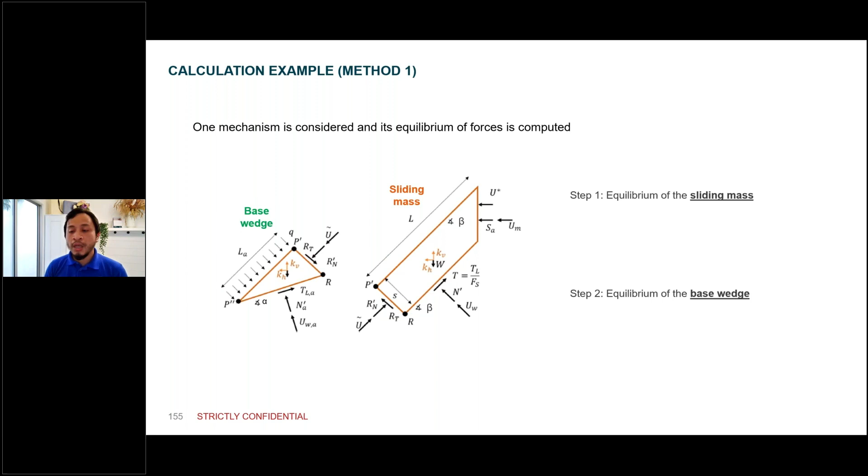So you assume basically a wedge failure mode on the slope facing, and eventually you verify how much elongation it takes for the netting, as well as verify the required tensile strength and punching strength.

Just to illustrate—in Malaysia this is not really a common practice, but in other countries the soil nail spacing can go beyond maybe 2 meters or 2.5 meters. So the whole idea of having this flexible facing is it allows the facing to take some of the loads, instead of using only 1.2 or 1.5 meter spacing—you can explore increasing the spacing.

You utilize more of the netting, because netting is way cheaper, more sustainable as opposed to anchors. Anchor cost will be way more costly than the netting cost.

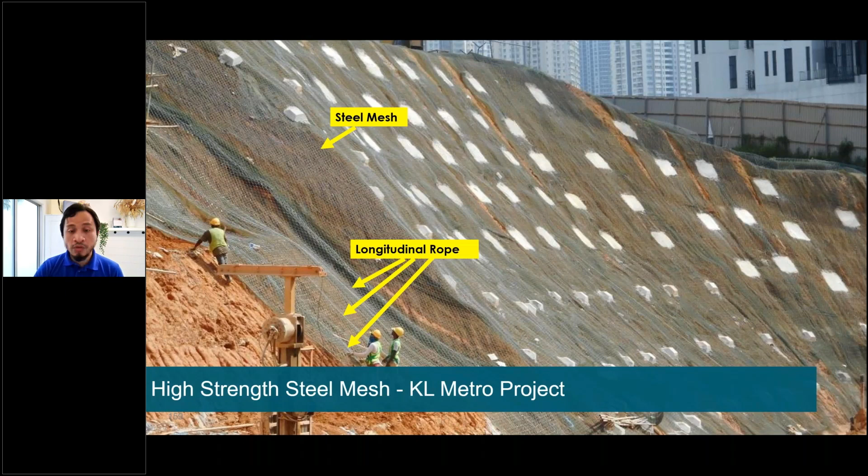Okay, now we're going to talk briefly about the geosynthetic function for road work improvement. So the work improvement here is actually a combination of maybe either drainage with separation, together with reinforcement or barrier. Let's look here.

Let's say you want to have an access road—normally you just lay a crusher run. The basic thing you can do, if the subgrade has a CBR more than 8%, you can just lay the geosynthetic for separation purpose. For temporary use, you just need it for separation, but for permanent use, you need to consider the filtration, looking into the apparent opening size together with the permeability.

The second point is that you can actually prevent capillary rise from the groundwater level, because this is more applicable if you're using a finer base, where it will suck up this groundwater and you have problems. So to filter out this layer and provide an impervious barrier, you can install the liner below the road base, just between the subgrade and the base layer.

Now, the point in the middle is actually the tension membrane concept. You can see here, once the wheel applies a certain load to the base, we introduce the element of tension to the geosynthetics.

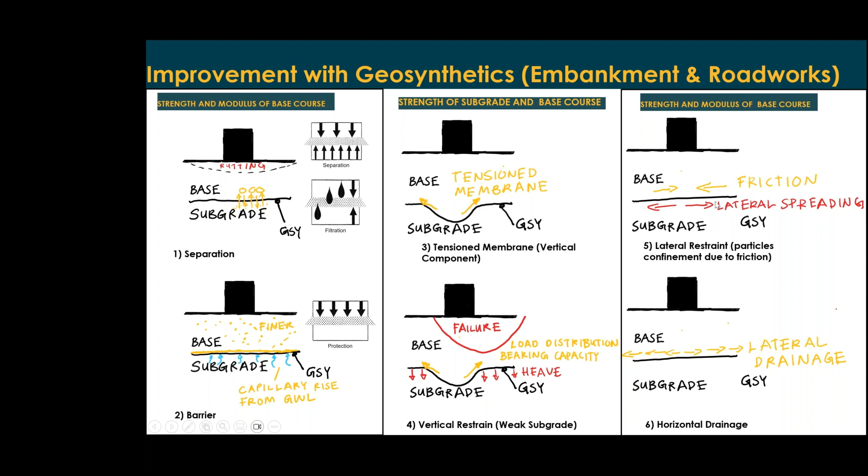This one is another concept where we talk about asphalt reinforcement. You can actually reinforce the asphalt layer, and normally this comes together with a glass coated geogrid, and you can add a separator together with it. The reason they use glass fiber coating is to sustain higher temperature during the paving process. The whole idea of asphalt reinforcement is to reduce maintenance cost and increase service life. In certain aspects of the design, you can reduce the base course layer thickness due to this increased service life, optimizing cost.

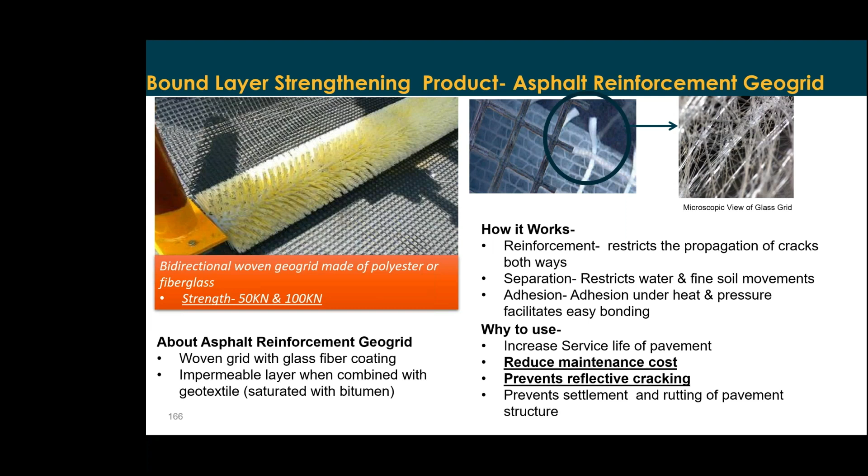And then consolidation settlement. Don't forget the excess pore pressure buildup. Even by having the reinforcement, you can't just put in straight away 10 or 20 meter high fill on top of it. You still need to allow for strength gain on the foundations, and if required, you may want to expedite it with a PVD. So basal reinforcement doesn't really reduce consolidation settlement that much. Consolidation settlement will still happen. You still need to rely on the strength of the foundations for the long-term case scenario.

But the reinforcement was there for short-term stability. So without reinforcement, you can only put a surcharge of maybe 1 or 2 meters, and you have to wait maybe 3 months. Instead, by having this reinforcement, maybe you can put in a higher surcharge, maybe 3 meters high, because this reinforcement will help distribute the load better to the foundation.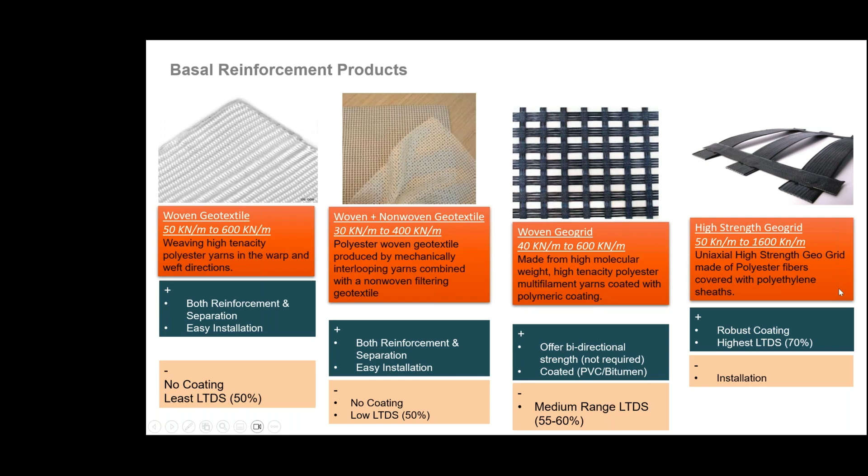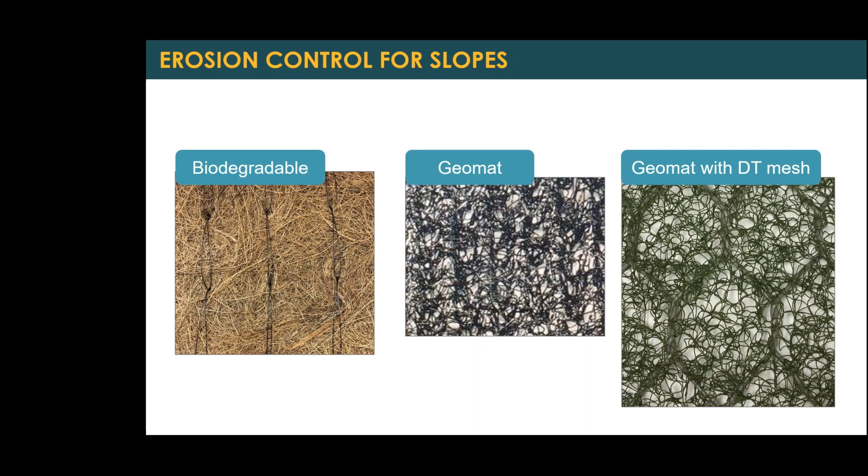When you talk about geomat, it's all about light penetration. When we carried out the experiment with Colorado State University, we identified that there's a certain amount of light penetration required for vegetation to grow through the geomat. It's about 40 to 70%.

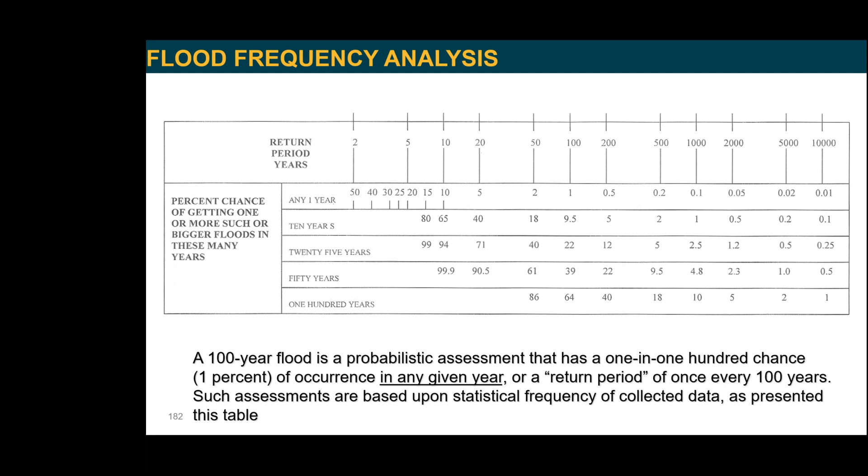Often people use a 1 in 100 ARI, average recurrence interval. That doesn't mean that the flood will only come once in every 100 years. What it means is actually, maybe the right term to use, the probability of the flood - 1% probability of flood that may happen in any year. So that is some misconception or confusion when you talk about the 100-year flood.

In terms of channel works, you can see here channel comprised of suspended load and higher bed load. The abrasion solution I mentioned just now is meant for the suspended load, not for the coarse bed load.

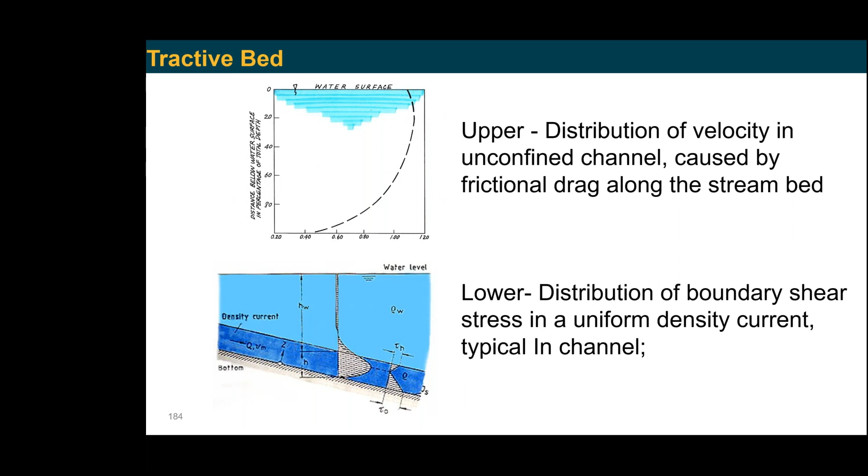When you design for channel works, we often refer to the velocity distribution. Why the state of the art now is moving away from velocity distribution - we focus more on the shear stress approach - is because what we're concerned with when you talk about river channel linings or river improvement works is the stress, the tractive force applied at the contact of the lining with the water. It can be in the bed or along the banks.

Why velocity-based approach is not the right way to go now is you can only average the velocity - you can't measure the velocity at the bed or even on the banks. So what you can actually use here is the shear stress based approach. It reflects it better because the higher shear stress will be on the bed load, which is a function of water depth. The river banks will have lower shear stress as opposed to the bed.

Competence and capacity - these are other terms you need to remember when you look at channel improvement works or riverbank improvement works. Higher competence and higher capacity - higher competence means that larger size particles will be brought together. Similar to the debris flow events that have been happening in Malaysia, it's all about the effective weight of the particles and buoyancy effect. So the dirtier the water is, the higher the density of the fluid.

Hence, the lower the effective density of the particles, the bigger the boulders a debris flow can bring with it, because of these buoyancy effects reducing the effective weight.

Now, another thing is capacity. Imagine you have a similar channel with higher velocity, you will end up with a higher capacity, which means more particles can pass through it.

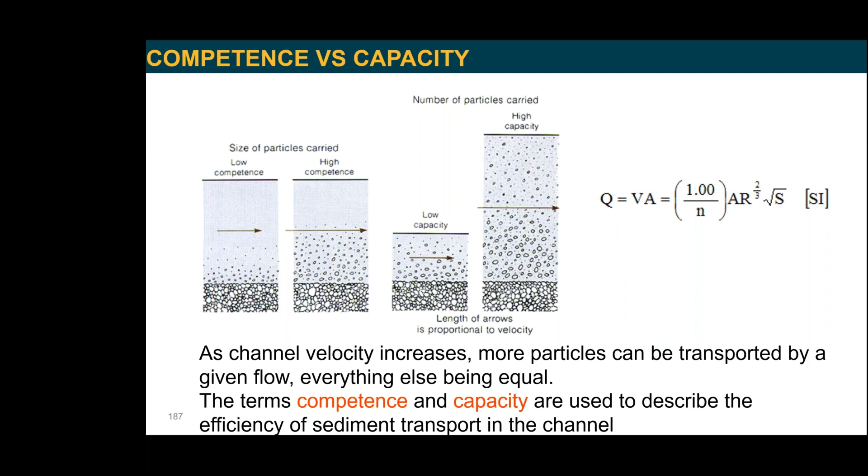Now, in terms of capacity and competency, this is important especially on riverbank improvement works. When you want to stabilize natural channels, you want the roughness to be almost similar to the natural channel roughness. Ideally, you can only achieve this with gabion, because gabion allows vegetation to grow and provides roughness compatibility between the improvement work sections and the natural section.

Secondly, this is also important when looking into river crossings. If you have a box culvert that is very smooth, you need to protect the downstream and upstream, because higher smooth channels mean higher competence and higher capacity.

So imagine these sediments that will be washed away at the toe due to the eddy bed currents, and hence why you need to be putting in maybe mattress or even gabions, not just on the culvert outlets, but across the bridge crossings and whatnot.

Now, when you want to use gabions for any type of riverbank improvement works, you need to do two checks, because, like I mentioned just now, gabion has more roughness similar to the natural channel. So you need to check the flood level after a few years, let's say when the vegetation grows. This relates back to the manning's value that you use.

For the end of installation, the Manning's value you use may be 0.05. After vegetation starts to grow, you may end up with Manning's of 0.07. What this means is, with higher manning's, you will end up with a lesser flow capacity Q, and it will increase the flood level.

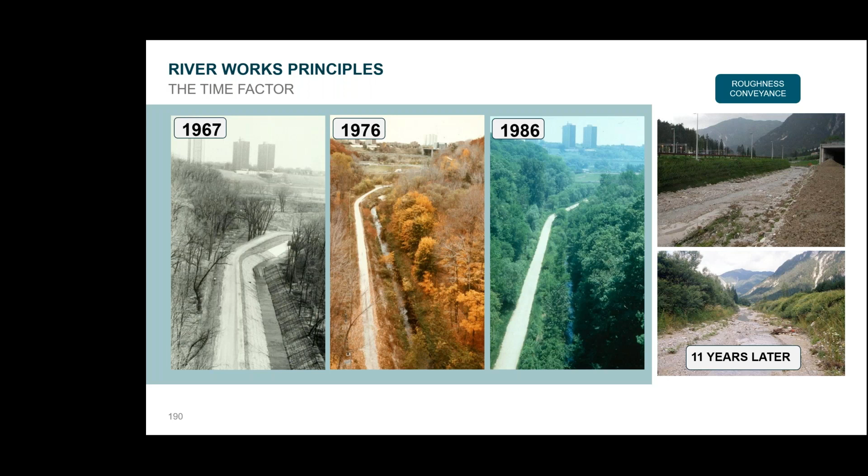Now, in terms of the gabion solution, you can actually use it based on location. You can use weirs for debris flow events to mitigate them, combined with sabo dams. As you travel towards the sea, the gradient is slightly less, and in this scenario you can start to introduce groyne structures and improve bank protection.

This is just to illustrate how it looks like along the riverbank, some of the intervention measures that you can actually use. So it's all about selecting the right roughness for the improvement works.

This is what you can actually use across the river on the drainage, for meander control. It's a bit different from what we used to do for riverbank improvement works along the banks. Normally when you have erosion, you just line it with gabions or mattress.

Instead, for this groyne option, you actually introduce a series of groynes, hoping that sediment will be built up between the groynes and reach the natural equilibrium naturally.

This intervention is more time consuming. You're not talking about immediate repair or immediate effect. You can see after introducing it, you may have to introduce a series of groynes over the years.

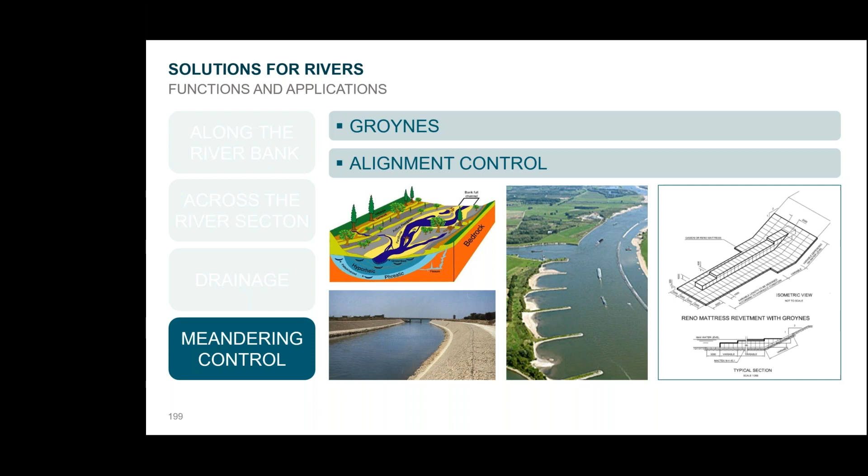Why gabion is also suitable for natural improvement work: here you can see filtration and permeability, because you're using a rock facing option, it is a free draining material, and flexibility, it can tolerate a certain amount of movement as opposed to rigid structures.

The whole point of this sustainable solution with gabion is you want the environment to integrate well with the structures. You can't even see the structures anymore.

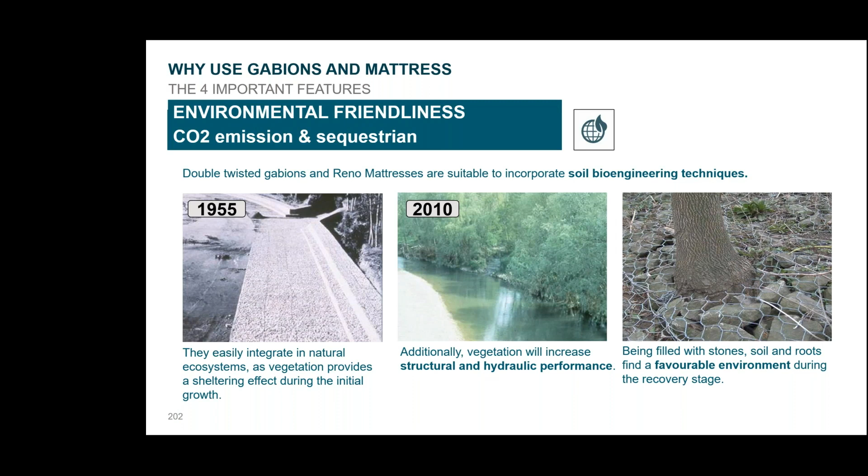Again, just a recap from what I've mentioned: gabion's durability is important, the right coating that you use, selection based on your design life, Class A, Class B, Galfan with advanced coating or with polymer coating, or zinc coating. This can all be captured in the performance specification, where you start to talk about the right property for the function of your design.

So Jennifer, I think that would be all from me, the conclusion, and maybe I'll open the Q&A session.

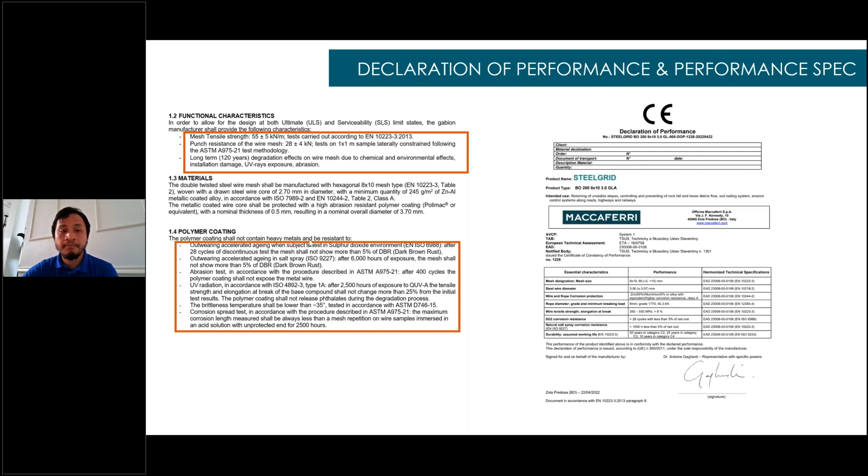IR Saifuddin asked: looking at your coating for dry condition, wet condition, and very aggressive conditions, I wonder whether for projects involving hill slopes, high cuts, or high embankment expressways with Gabion walls, where there's a constraint on the ROW, what condition do you recommend, and do you have any monitoring system over 20 to 30 years to confirm the system adopted is working as intended?

It's a good question. But in terms of measuring, you can only measure it once you start to see the corrosion. So there's nothing much you can do after you install the Gabion on site.

For the expressway application, it has to meet at least 100 years design life, so that's why we've been supplying Galfan and polymer coatings for our Gabions. Interestingly, as I mentioned in my presentation, I attended a discussion with a contractor and consultant looking into temporary works with just zinc coating, but that was for river works. I told them that with zinc coating, you can't even meet a design life of one year, so they decided to use Galfan coating to meet at least 10 years design life for the temporary works requirement.

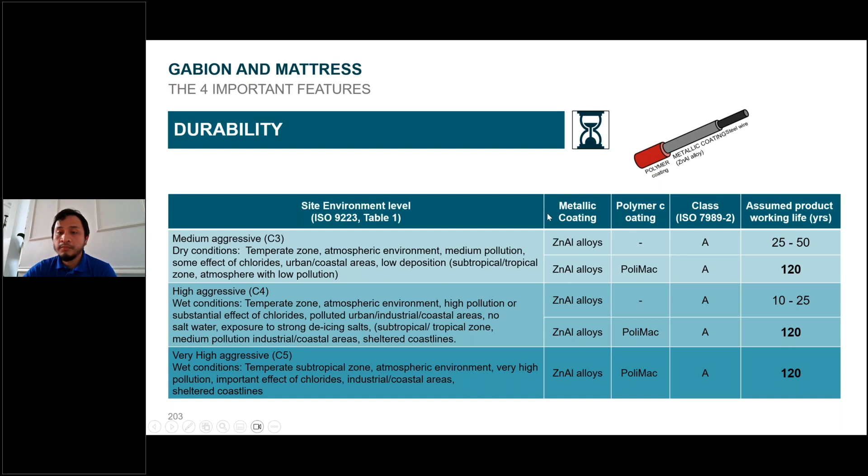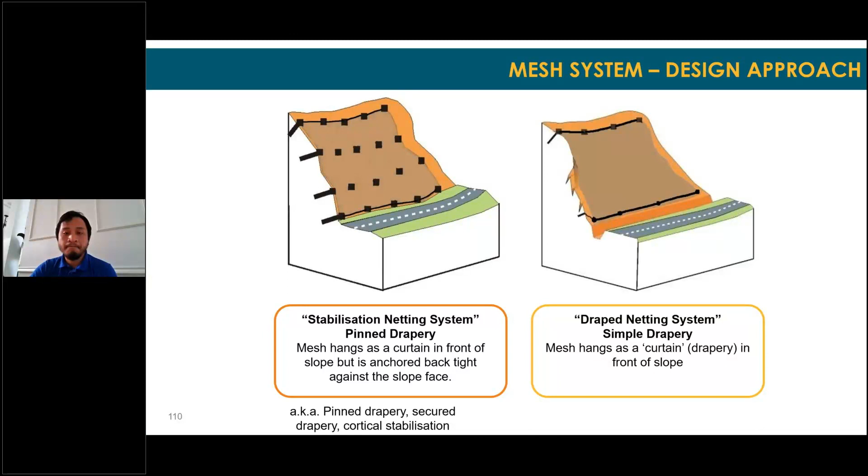Yeah, basically this is a good question really. That's why as an engineer, we really need to understand the groundwater behind the wall or the slope you want to build, or the fill you want to build it against. That's why during the SI investigation, ideally you want to at least put in some standpipes, and then monitor the fluctuation of the water for several months.

Often than not, in Malaysia, the current practice is we just rely on the water level measured during the drilling process. This may not be the right water level depth, because imagine during drilling, if you have clayey materials with a permeability of 10 to minus 7, imagine the amount of time it takes before the water starts to dissipate. That is why it's always important to monitor the groundwater level over a certain amount of time. So that is in terms of the investigation aspect.

Nowadays we also have what we call a vibrating wire piezometer, where you can put a sensor into the drill holes, connect it to a logger, and it will measure the pore pressure within the boreholes over a period of time. You can leave it there even during construction if you select the right location. You do not want to put the vibrating wire piezometer or standpipe in the construction area itself. If you put it further up, while they're doing the construction, you can still monitor the groundwater or pore pressure within the slope.